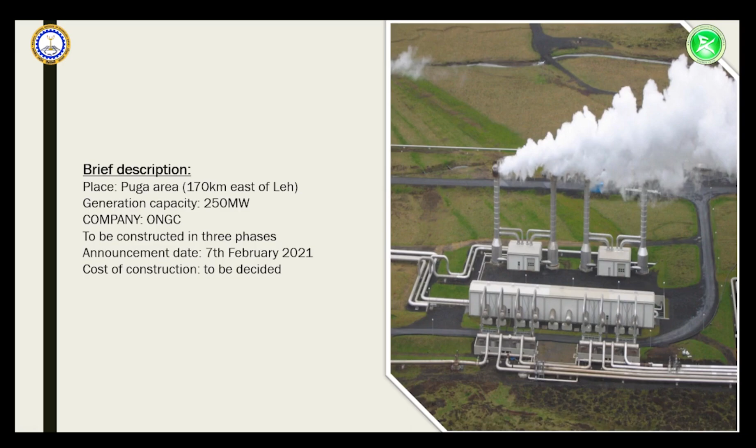The geothermal power plant is to be constructed in 3 phases by ONGC. The first phase includes drilling up to 500 meters to tap the steam and hot sulfur water that spews out of the geysers. It would help in running the power plant with a capacity of 1 megawatt. In the second phase, drilling will be done a bit deeper to explore the potential of the thermal reservoir. The third phase involves setting up a commercial plant. The estimated power supply would be 250 megawatts.

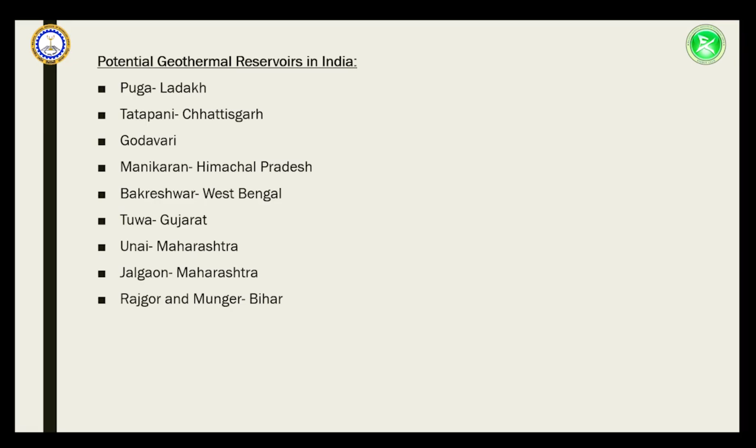These are some potential geothermal reservoirs in India, situated in Chhattisgarh, Himachal Pradesh, West Bengal and so on. There are several benefits of this plant, like it would be a source of continuous energy which can be used for generating electricity. Also, space heating would be very handy by hot water from the spring. Establishing hot swimming pools would be good as a tourist attraction.

Ladakh would be a self-sustaining economy and it would emphasize the government's vocal for local call. Establishing this kind of plant would open new work avenues for locals. The renewed focus is on the perpetual form of energy, as it is considered to be extremely environment friendly and would lead to a carbon neutral Ladakh.

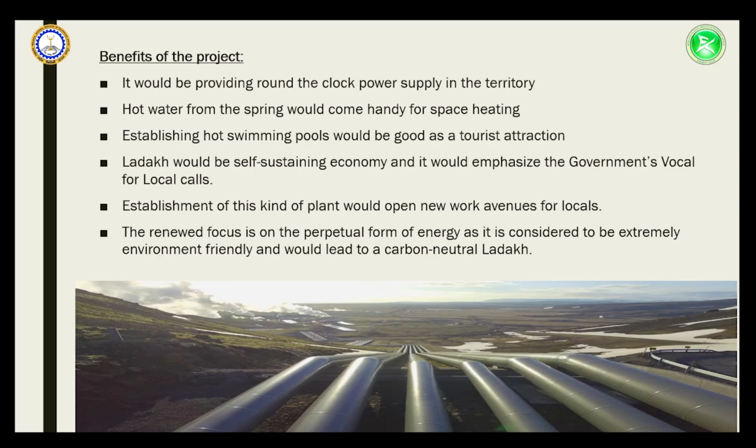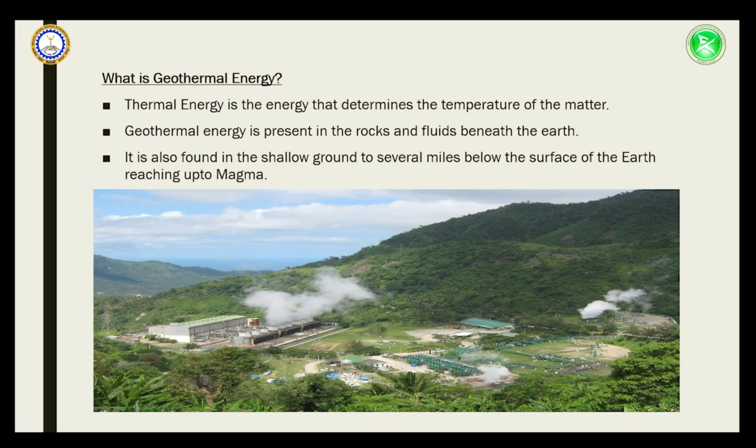Now let's discuss what geothermal energy actually is. The rocks and fluids found in the shallow ground to several miles below the surface of Earth, reaching up to magma, contain geothermal energy. In order to convert geothermal energy into a useful form of energy or electricity, 1.6 kilometers or more deep holes are drilled into underground reservoirs. Steam and hot water are tapped in these wells to drive the turbines. The turbines are in turn linked to electricity generators.

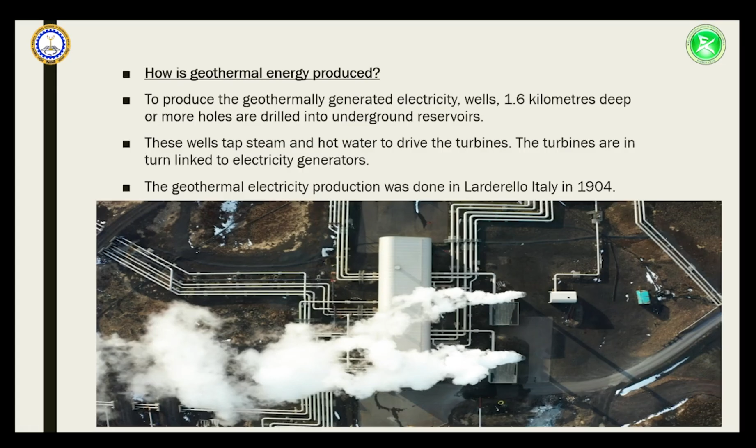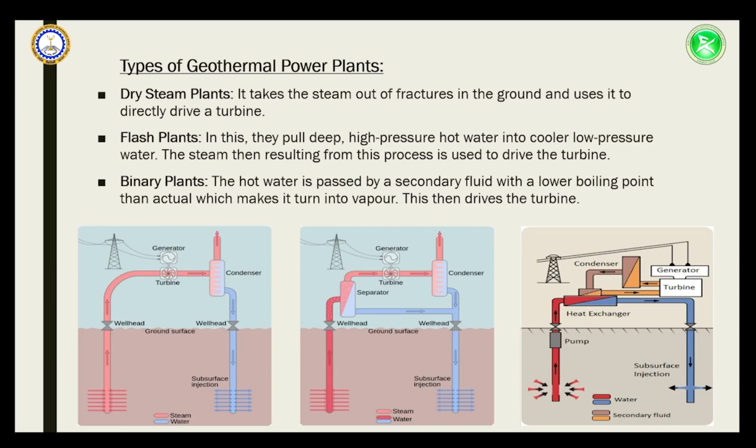Basically, there are 3 types of geothermal power plants. Dry steam plants take the steam out of fractures in the ground and use it to directly drive a turbine. In flash plants, high pressure hot water is pulled into cooler, low pressure. The steam resulting from this process is used to drive the turbine. In binary plants, the hot water is passed by a secondary fluid with a lower boiling point, which makes it turn into vapor. This then drives the turbine.

So here come the advantages, which are the very first need of any new effort. Geothermal energy is extracted from the earth without burning fossil fuels, and geothermal fields produce practically no emissions. So they are perfectly environment friendly. When looking at the availability factor, which shows how reliable and constant specific energy sources are, geothermal ranks on the top. It is an exceptionally constant source of energy.

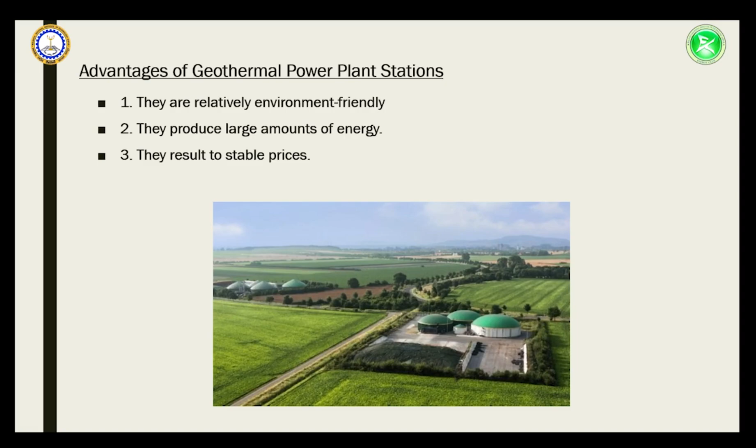Geothermal heat pump systems use 25% to 50% less electricity than conventional systems for heating or cooling. And with their flexible design, they can be adjusted to different situations, requiring less space for hardware as opposed to conventional systems. Also, it barely includes any input that depends on the market. This results in a lower and stable price.

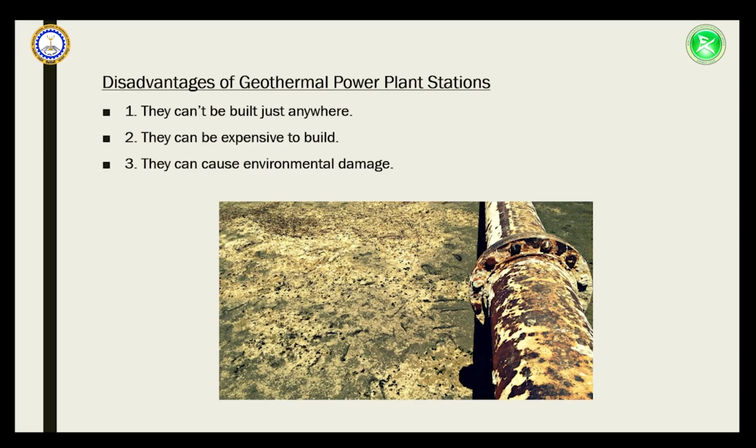Now here come the disadvantages of geothermal energy. The availability of geothermal energy at appropriate depth is the main factor. They can be built only on potential geothermal sites. The need for drilling and installing quite a complex system into one's home makes the price climb quite high. Unfortunately, no matter its reputation of being an environment-friendly alternative energy source, geothermal energy also causes some environmental damage, like it can impact underground reservoir water quality.